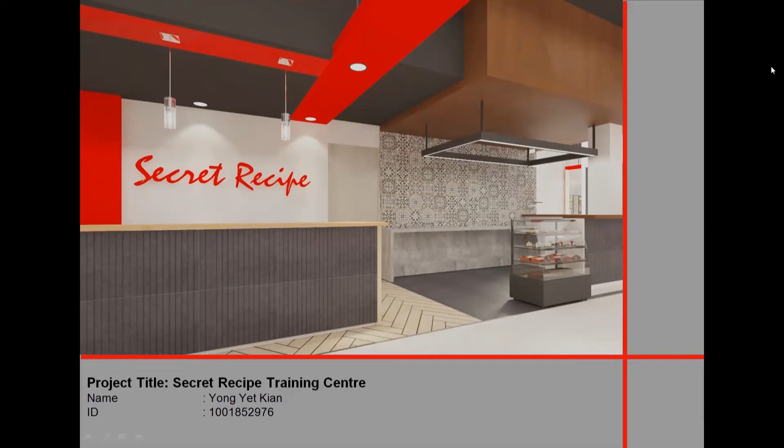I'm Terry. This is my project, Secret Recipe Training Center Design.

Their vision is to create a new lifestyle culture. Their mission is quality of food and dessert, quality ingredients coupled with moderate pricing. Their value promise is a quality lifestyle, positioned as great quality food at an affordable price.

A training center is about acquisition of knowledge and skill as a result of teaching vocational or practical skills and knowledge. They relate to specific useful competencies. A training center has specific goals of improving one's capacity, productivity, and performance.

For users, there are 6 types provided: officer, executive, worker, trainer, trainee, and outsider visitor.

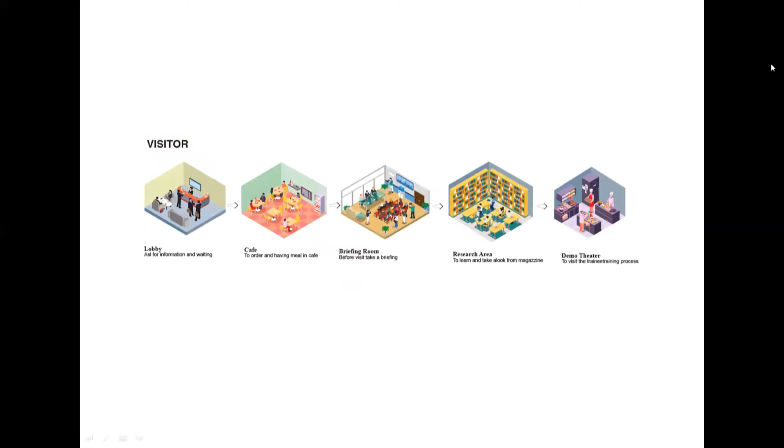For the trainee schedule, it's separated into 2 parts: one is full course training, and the second part is for part-time course training. Part-time course training is for people who come after work.

For the activity, we have applied baking, culinary art, cake decoration, fruit and vegetable carving.

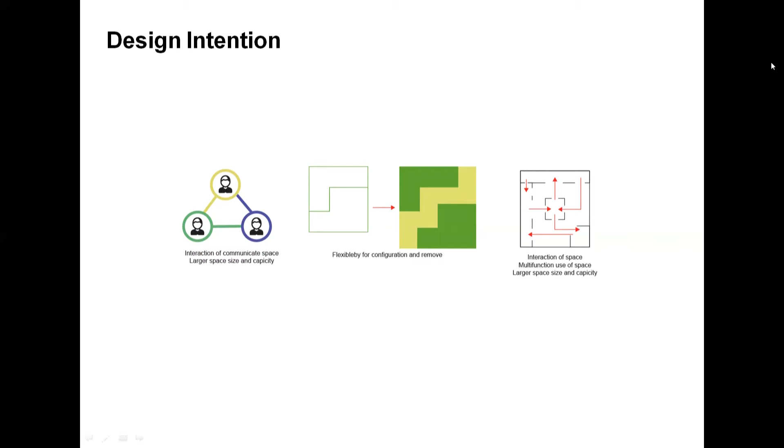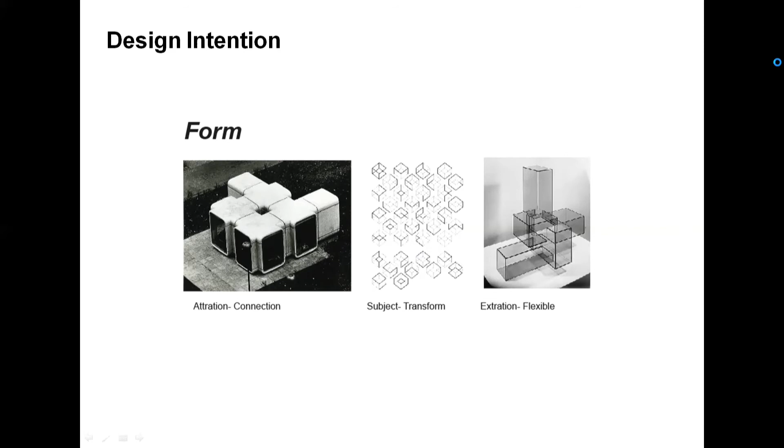For the design intention of form, the attraction is the connection about the modular idea and subtraction to transform the line form, with some flexible ideas in the design, also extracting the flexible aspects of the shape and function.

In terms of flexibility function, three areas will connect together: cafe, briefing room, and test kitchen will link together. For general space, there is a normal cafe room, briefing area, test kitchen, and demo theater. But as multi-function, it can become an event area, exhibition hall, competition space, gathering area, event talk, or business meeting space.

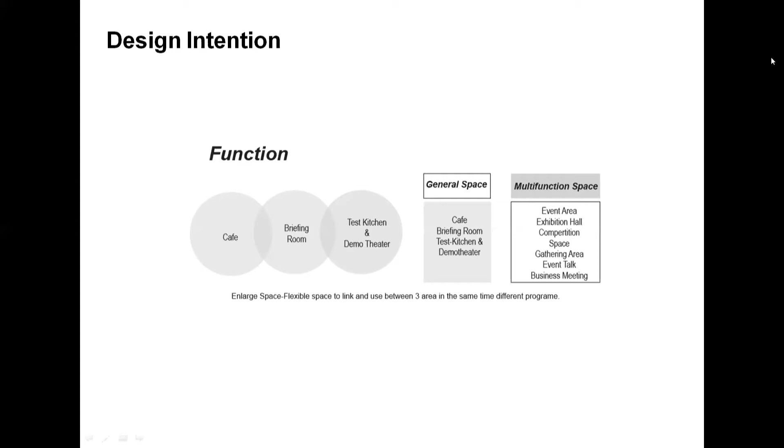For material, normally HSS steel will be used, as it's easier for construction of structure and furniture.

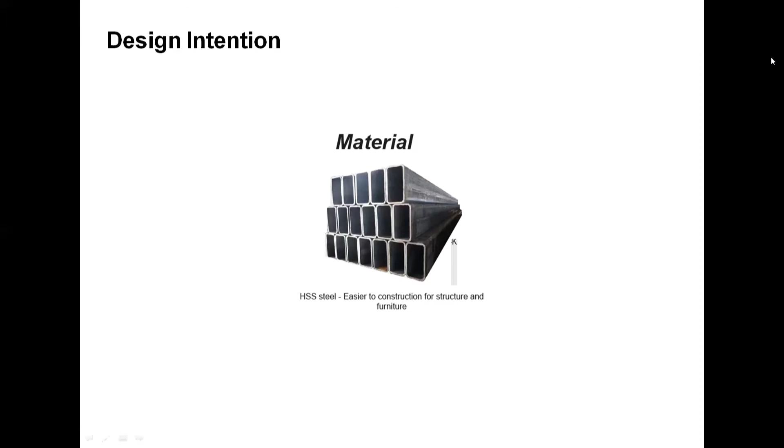Option 2 can become a larger area for the cafe area using the briefing room. Next, the demo theater and briefing room connect together, becoming bigger for business, and can also enlarge the briefing room, test kitchen, and demo theater.

For multi-function space usage, it can become a fully exhibition event at 100%, with space size suitable for large exhibitions and events. Fourth, the cafe area remains at 32% size, but behind the cafe, the test kitchen can become competition, gathering, and event hall space, making it multi-functional.

The last option still remains the same as the general one, but the briefing room can become an event talk space. On the left and right, it remains cafe and competition/gathering space, without disturbing the activity.

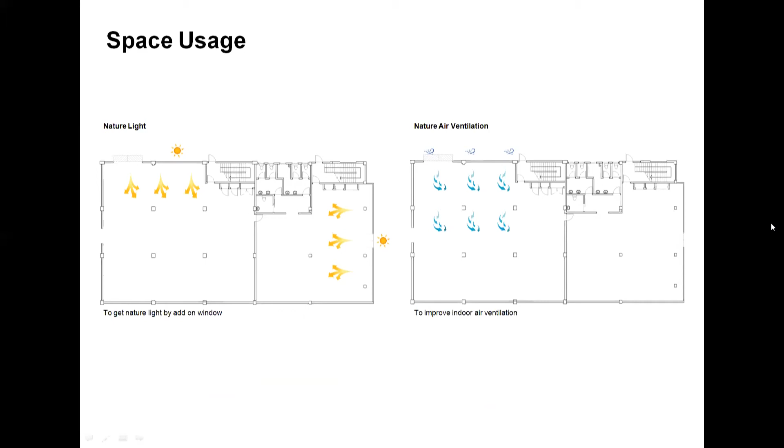From the area, there's hot air release because when cooking, there's a lot of hot air and smell. So at the center part, the design will not be disturbed and will be kept white.

From the space interaction perspective, I tried to make a connection between the front part and behind, so it can have a big communication space and an interaction when the cafe or briefing room at the center part connects together.

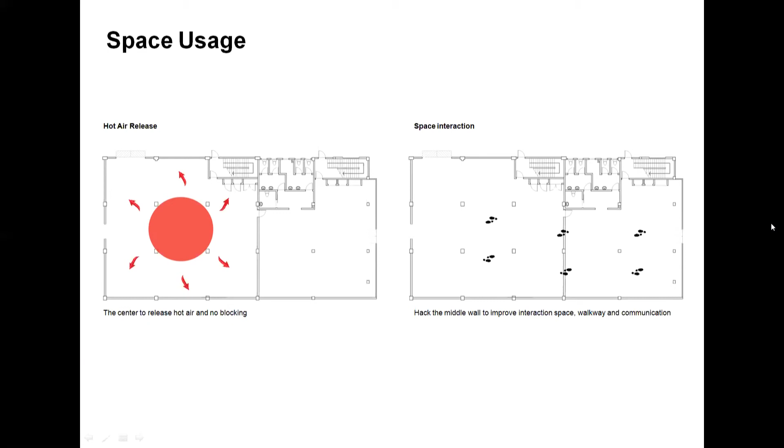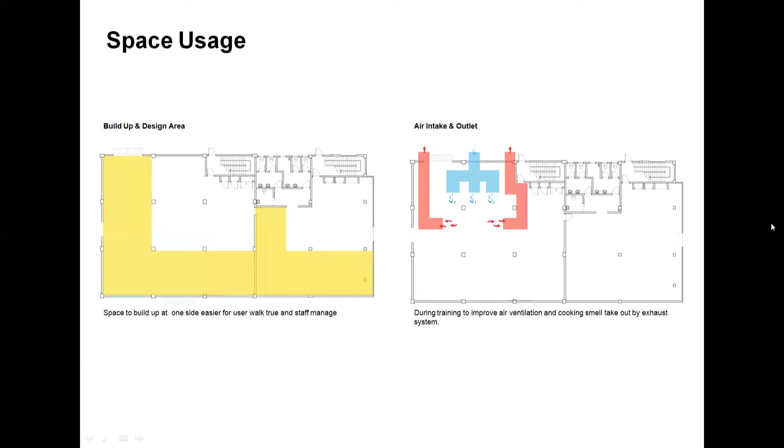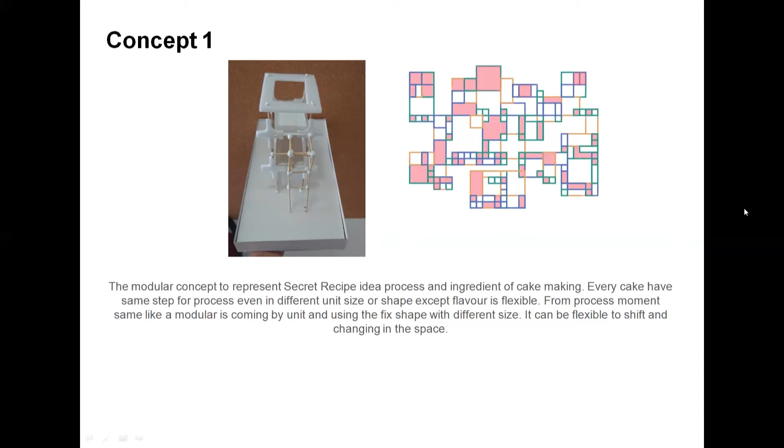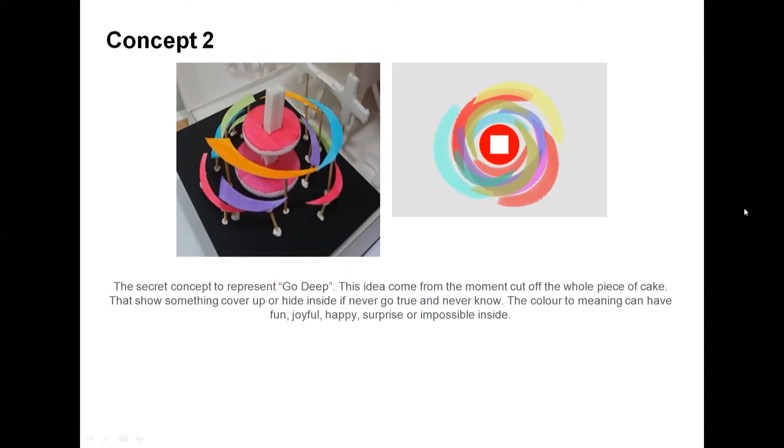For the second concept, the secret recipe idea comes from the 'secret' representing going deep. This idea comes from the moment you cut off a whole piece of cake that shows something covered up inside, and if they go inside, they will know what they have. It also represents feelings of happiness, joyfulness, and surprise.

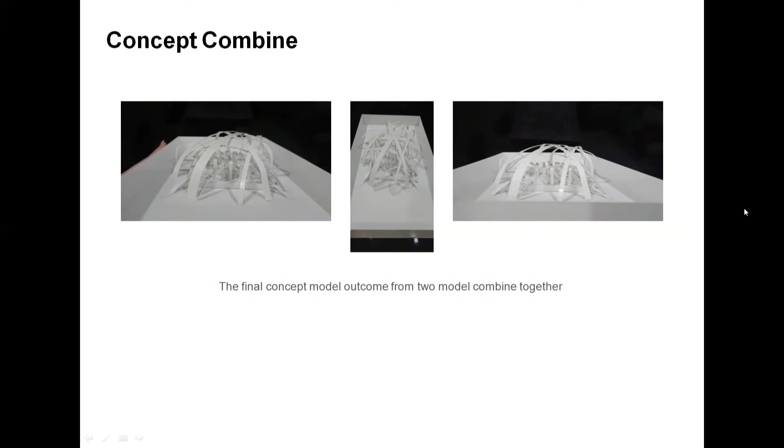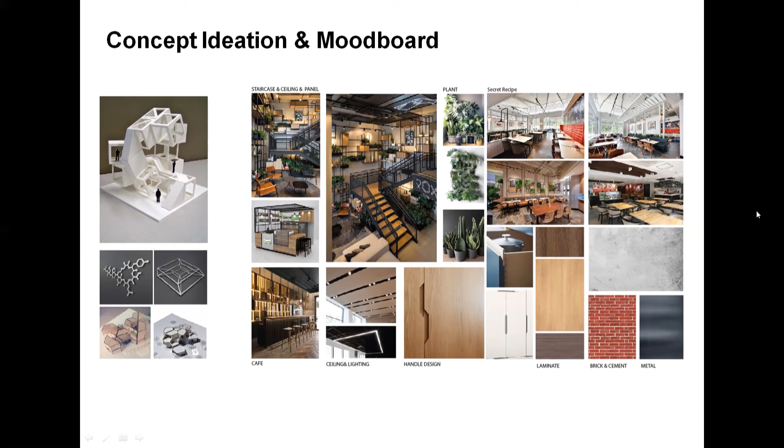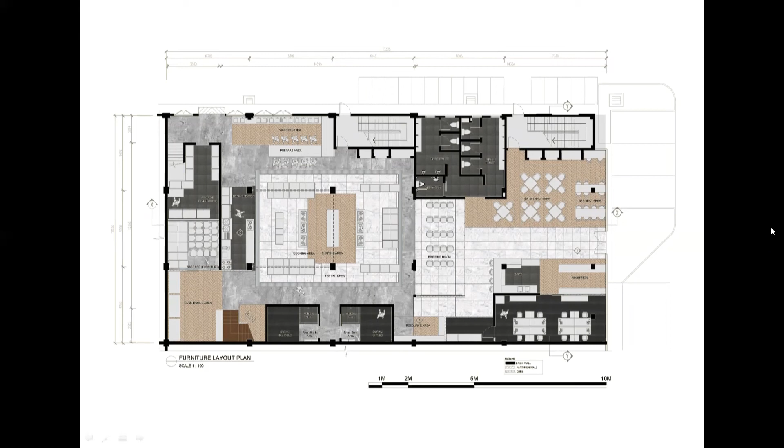And this is the floor plan for the design. The design generally separates into 2 parts of material for the floor: first the marble tiles, and second the general cement render. For these two, the color and feeling try to make it become the same together and feel much together.

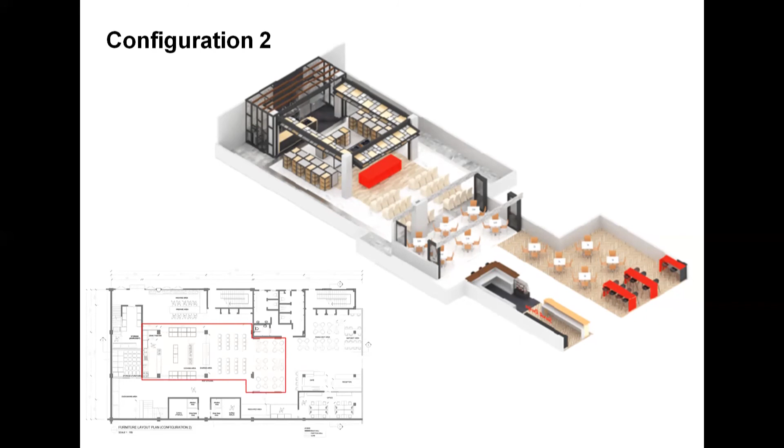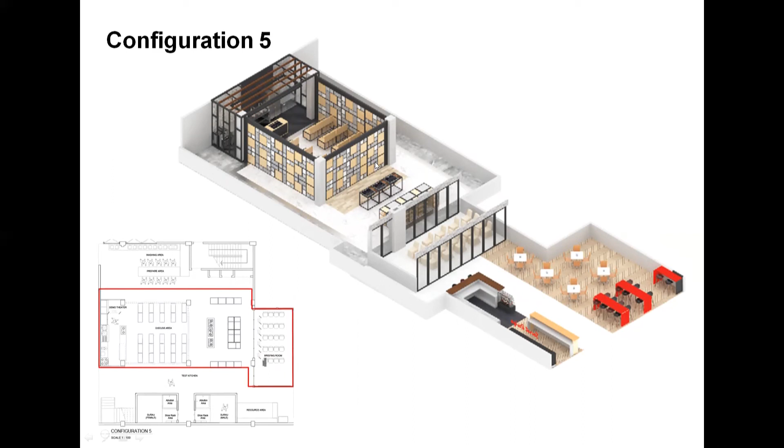This is a configuration tool to show how the space can be used if the door is open, or also inside the briefing room, which can still fit chairs and a dining set if there's an event in the demo theater and test kitchen. This is configuration 3, 4, 5. For number 5, this has a privacy area like when students and trainees have meetings, they can close it all the way. This is also for private events, or for VIPs who don't want people to see inside, they have this option.

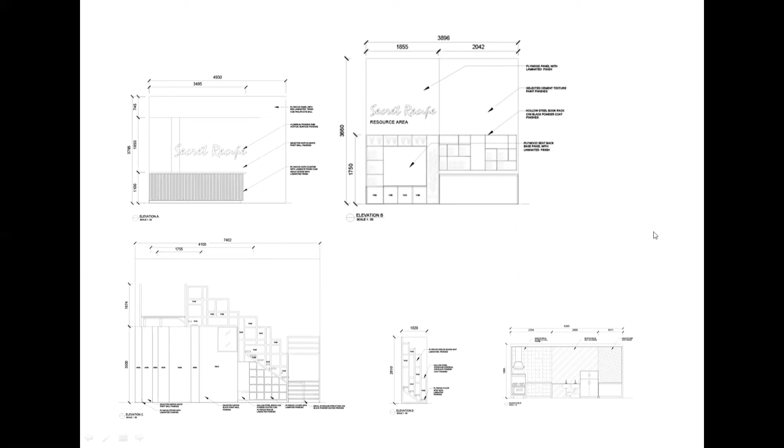Here again is the elevation for the design, and this is the detail, specifically the detail of the meeting room. So it's not box to box, and the HSS still makes a support, so it's not like a modular hanging on the top.

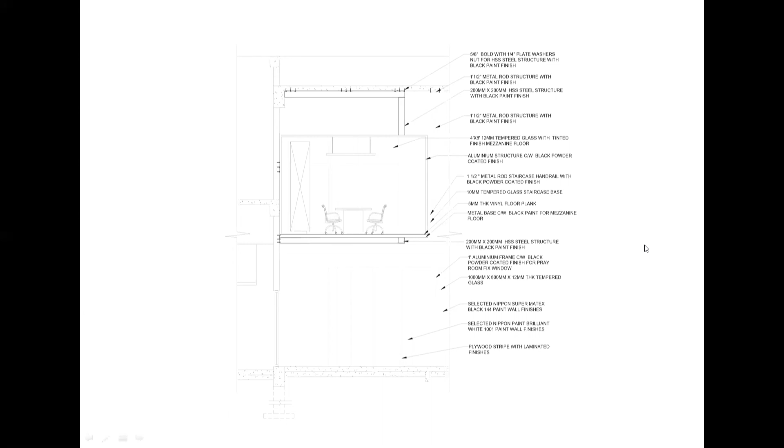And this is the perspective of the exterior, cafe, reception, and so on. For the ceiling color, this red color can bring light. Abstract people follow the line and are brought to another space. It's the abstraction, and also the dominant element inside the space design.

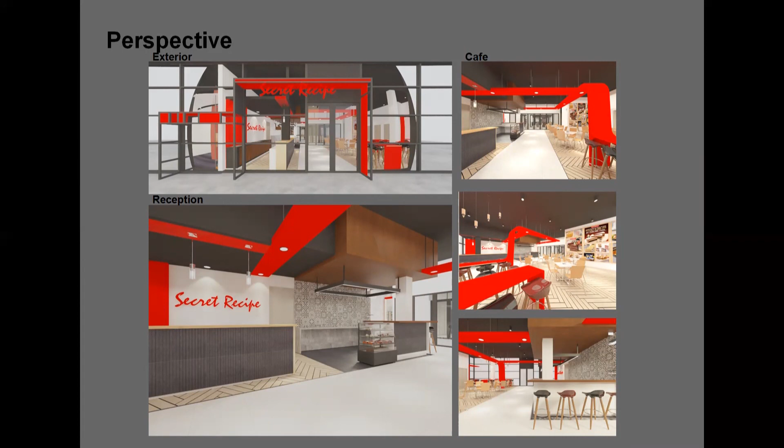And this is the office area, toilet, entrance, and toilet. You can see the briefing room beside is connected together. If they open it, it can become a multifunction space with flexibility in the design.

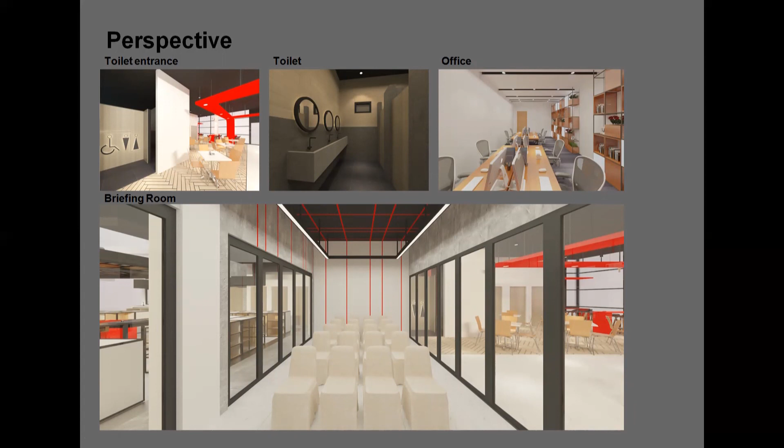Also, this is the resource area at the front, and this is the storeroom, the demo theater, washing area and preparation area, and also this one is the kitchen area.

So for the idea I mentioned just now, this is the way to apply the exhaust system from front and back, to exhaust and take out the air to outside, with clear air and nice ventilation from the window area here. And this is the first floor connecting with the ground floor downpipe.

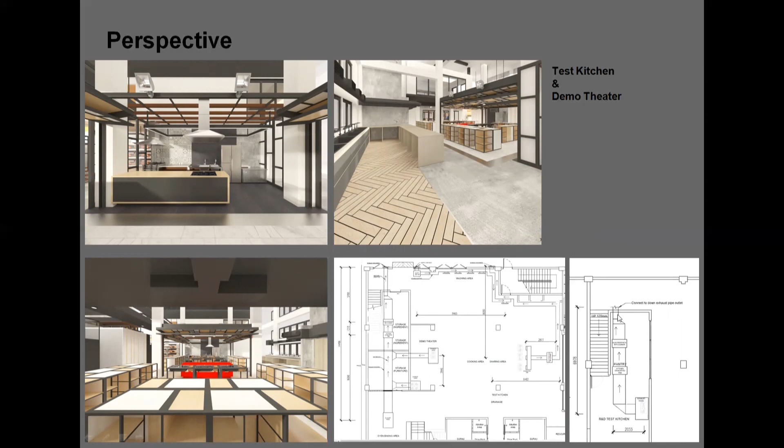And this is the perspective of the staircase, and from the staircase, underneath here is the locker, and behind here is the surround. For this one, to abstract the light inside and get natural sunlight, and also know where the area is to pray. And this is an open picking area, for a person to come and pick more easily.